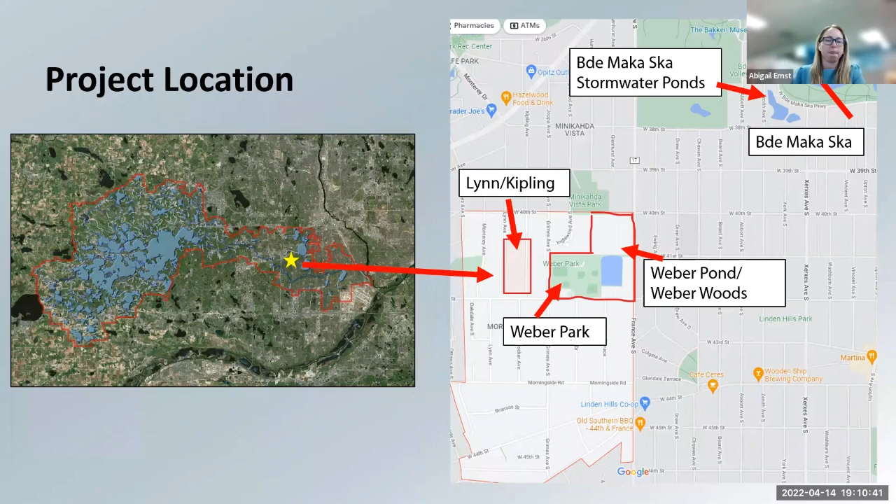Next, I wanted to share a drainage and storm sewer map. The project is happening here, and the drainage from the project flows through an existing storm sewer network before flowing through the stormwater ponds and then to Bde Maka Ska.

I'm going to talk through a little bit the project areas. The first and most upstream project area is the Lynn Kipling area. The main improvements to this area include pond excavation to remove material, which is going to provide more flood storage space. The runoff storage capacity is going to increase from 10 acre feet to 20 acre feet, providing flood risk reduction for those homes surrounding that area.

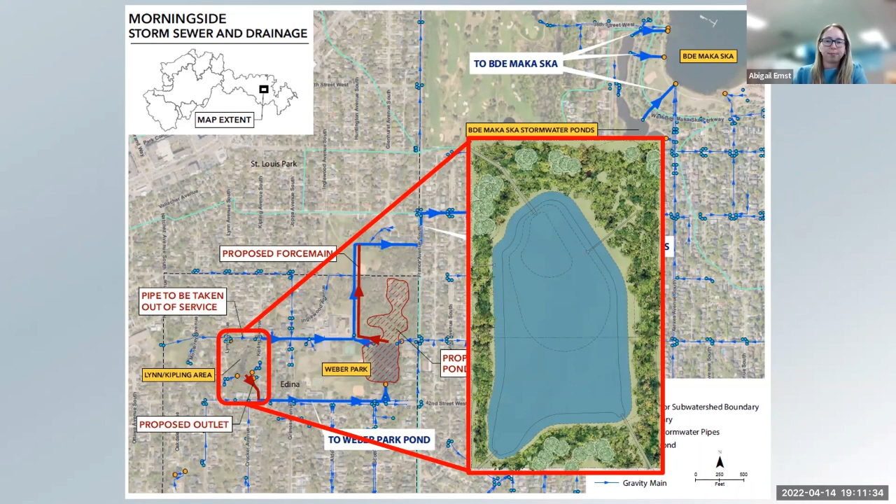The storm sewer system in this area is also going to be altered by splitting flows. Currently runoff from the Lynn Kipling area only flows through an existing storm sewer network north of that area, bypassing Weber Pond before heading to Bde Maka Ska. What the project does is propose a new outlet in the southeast corner, which will take some of those flows, specifically the low flows, and route them toward Weber Pond, providing additional water quality treatment before flowing downstream again through the existing storm sewer network. Additionally, the outlet at the northeast corner will be maintained, serving to route high flows around Weber Pond during storm events.

So the next area where there's work proposed is the Weber Park area, which lies between the Lynn Kipling area and Weber Pond. Improvements here include new pedestrian trails, reoriented ball fields, and a stormwater drainage swale.

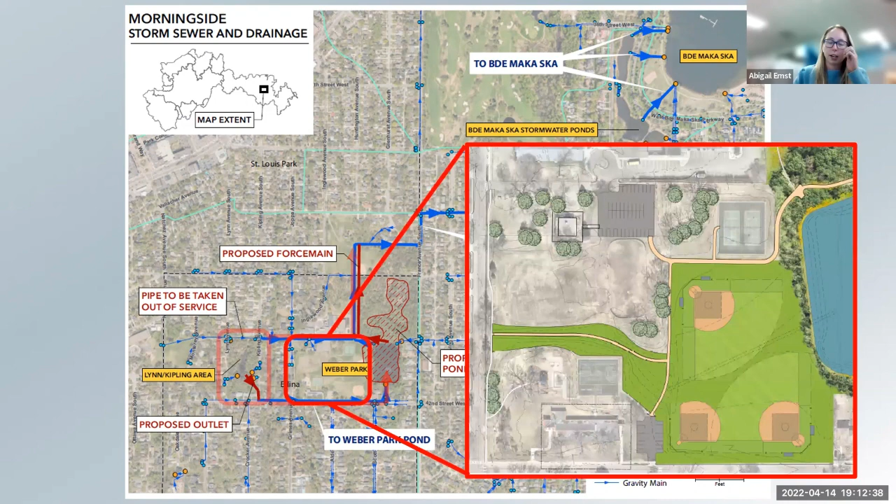Now moving past the park, I wanted to introduce the Weber Pond expansion. Weber Pond is currently a stormwater pond of about 3.1 acres, and as part of the project, it's proposed to be expanded to 6.1 acres. This happens by both excavation in the current ponding area and by expanding the pond into this northern wooded parcel and making that area deeper. That excavation and expansion is going to double the storage capacity of the area, going from around 50 acre feet to around 100 acre feet of storage.

That'll serve to collect stormwater runoff from the surrounding houses and also provide water quality benefit by allowing for more nutrients and particles from that runoff to settle into the pond before it flows downstream. In addition to the pond expansion, they've also proposed some perimeter trails and some boardwalks which will traverse the pond.

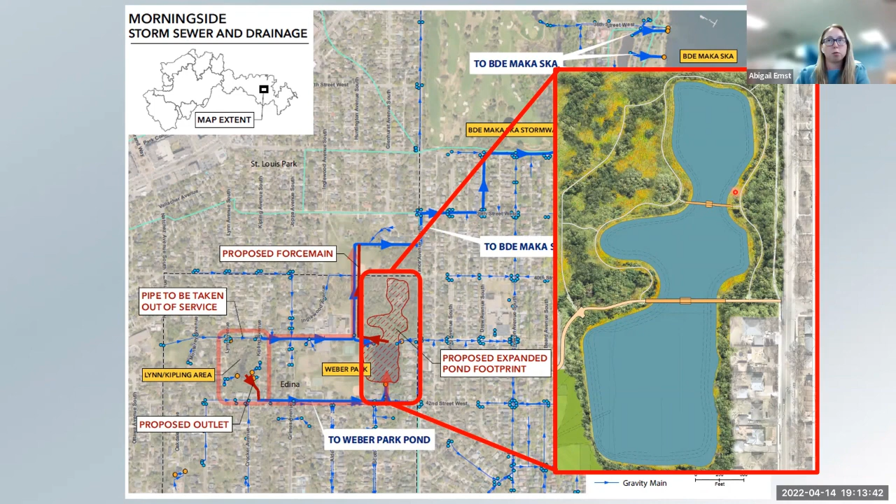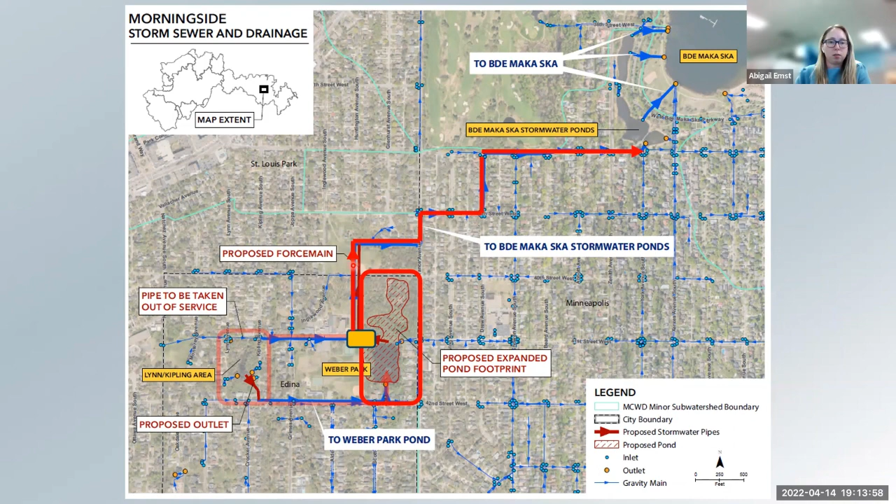In addition to the pond expansion, there's also going to be a pump station added right here, and that's going to pump drainage from the pond northeast along this red line and use the existing storm sewer system. That pumping is going to take place through 3 different regimes.

The first mode is periodic pumping. This will happen every day for about 1 to 3 hours, and it will serve to maintain normal water levels below the gravity outlet to compensate for the groundwater inflows.

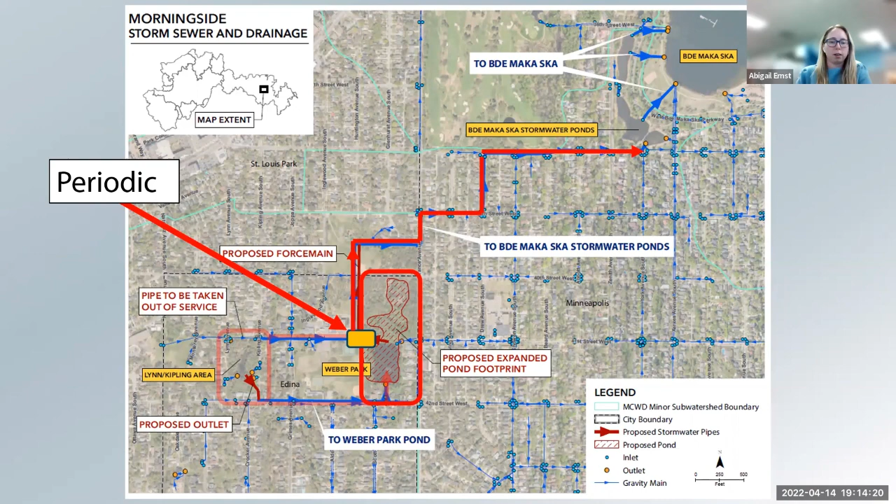The second mode is predictive pumping. This mode will be used in advance of 10-year storms and above, and it will lower the pond by up to 3 feet, dependent on weather forecast and the pond water levels. The whole goal of this predictive pumping is that they'll send water downstream ahead of storms, which will create more storage capacity in order to accept runoff from the surrounding neighborhood.

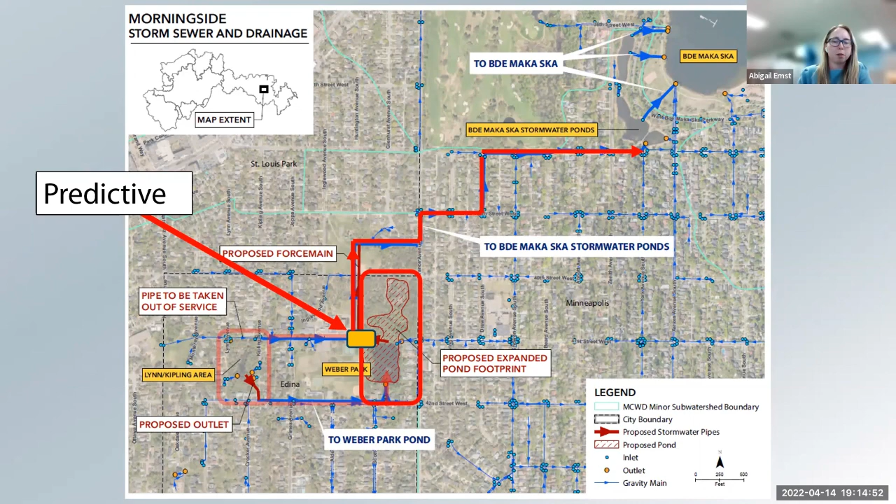The last mode is pumping during and after events. This will again take place during those larger events, so 10 year and above, and it will serve to manage the water levels. Again, that amount and duration is going to be dependent on National Weather Service forecasts and water levels at Weber Pond.

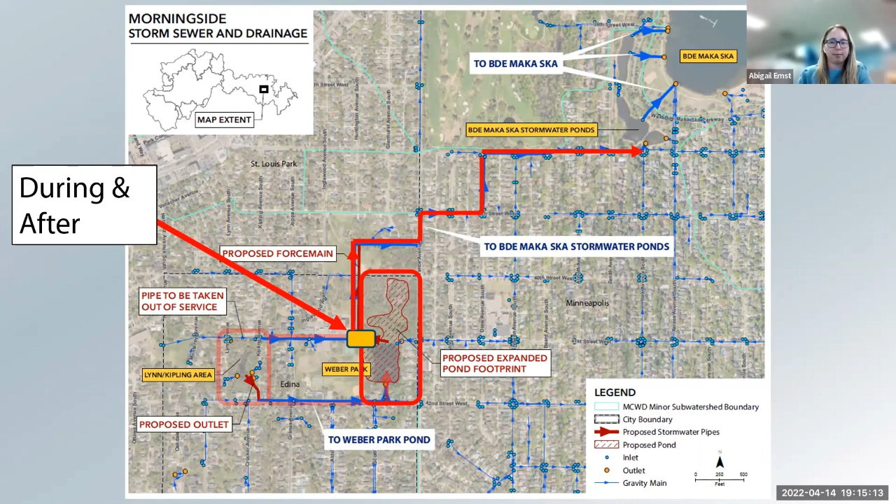So from here, I wanted to move into the rule analysis that was completed by district staff and engineers. Based on our review, the project complies with all the applicable MCWD standards.

The first rule that was triggered was erosion control, and this was due to the proposed disturbance of over 5,000 square feet. So once Edina puts the project out for bid, a requirement of the contractor is going to be to design an erosion and sediment control plan, which will be proposed as a condition of approval for the permit.

The second rule triggered is floodplain alteration, and that's triggered due to the excavation below the high water level of Weber Pond. As we discussed, the project is proposing a net increase in flood storage capacity, which complies with the rule.

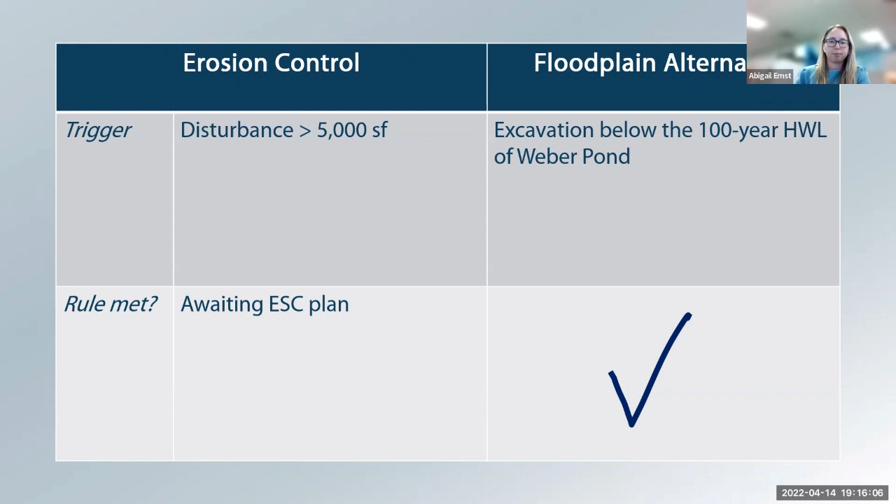The last rule triggered is the stormwater management rule, and this was due to the impervious that's being changed in the Weber Park area. So due to the site size and the proposed disturbance, the applicant is required to meet two parameters of the stormwater rule: the volume and downstream impact parameters.

The volume parameter requires that the project controls for the first 1 inch of runoff over the site's impervious, and they propose to meet that requirement by adding soil amendments in the ball fields and green spaces.

The downstream impacts parameter requires that there's no impacts to the downstream water levels. So the applicant modeled that during the 1, 10-year and 100-year storm events, Bde Maka Ska water levels will not rise, which is in compliance with the rule.

So rate control was not a required parameter to be met. However, the city still modeled peak flows at the city of Edina boundary and at the point of discharge to Bde Maka Ska. As shown for both of those locations, rates are decreased for the 10-year and 100-year storm events.

Additionally, although another not required parameter is phosphorus control, for the project we still evaluated this because of the interest in the project, and it provides phosphorus control by virtue of providing volume control. So through the soil amendments, they're providing a net reduction in total phosphorus.

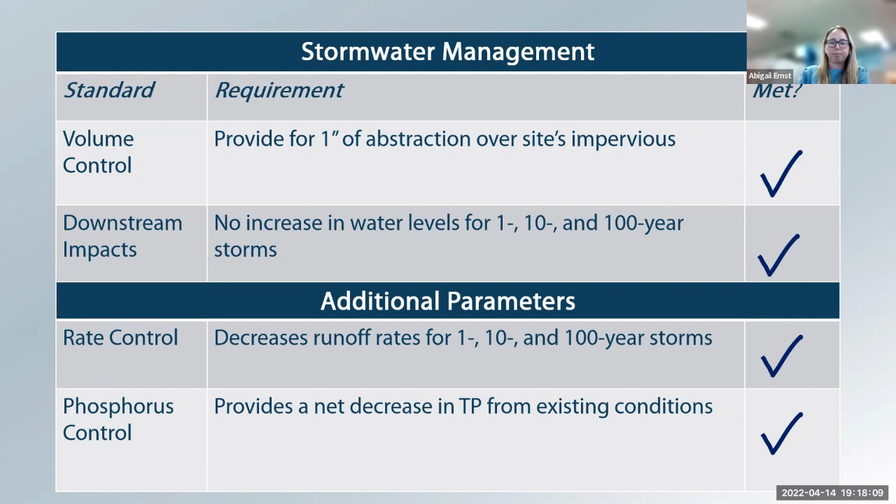While the project meets district rules and provides both water quality and flood mitigation benefits locally, and rates are decreasing downstream with no flood stage increase downstream, the pumping overall does send a larger amount of volume downstream than it does in current conditions. The volume has a secondary effect of increasing phosphorus to Bde Maka Ska by 8 pounds a year, despite that reduction of 34 pounds out of Weber Pond.

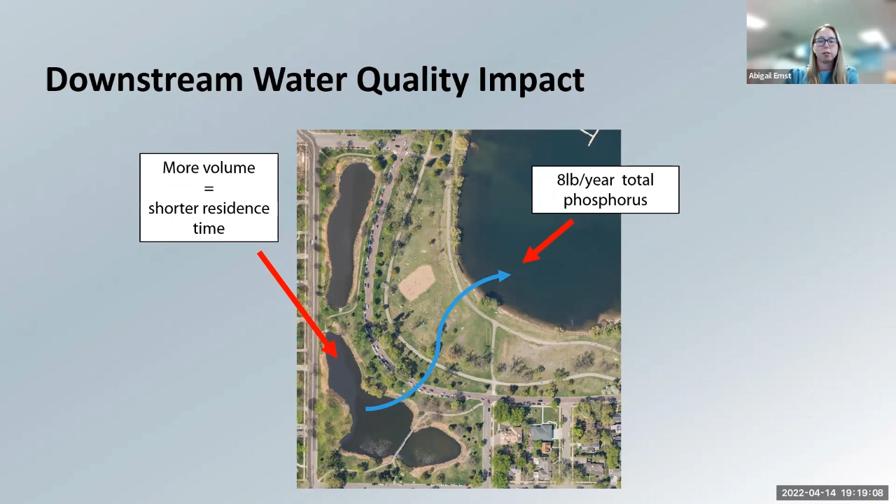The situation is unusual and not something the district has encountered before. Essentially, because more water is flushing through the pond, there's less time for particles and nutrients to settle out, which means they get carried downstream with that water. Although those 8 pounds only represent a 1% increase in the annual watershed load, it's still considered an overall degradation to the lake.

At the March 10th committee meeting, we discussed that in order to mitigate that impact, the district would apply a condition to the permit requiring the city of Edina to address those 8 pounds, either through a unilateral project at the Morningside project, or by working with partners to look downstream for projects that would create a net water quality improvement for Bde Maka Ska. This would happen through the signing of a cooperative agreement to address the impact.

Since then, the district has continued to meet with the city of Edina, the city of Minneapolis, and the Minneapolis Parks and Recreation Board to further discuss the cooperative agreement and its structure and the involvement in that agreement. That agreement can be found in the board packet. The cooperative agreement details how Edina is going to work with Barr Engineering to perform a feasibility study to address those 8 pounds or potentially go beyond that.

The feasibility study is going to explore options at the Morningside project for a potential retrofit solution. The study to look at that option is going to cost $55,000 and it's going to be solely covered by the city of Edina.

In parallel, the study is also going to be looking downstream for projects that provide a net benefit in water quality to Bde Maka Ska. This portion of the study is projected to cost $68,900. We'd originally proposed that the cost be split equally amongst the 4 parties, Edina, Minneapolis, the Parks Board, and the district, and that would be about $17,000 each.

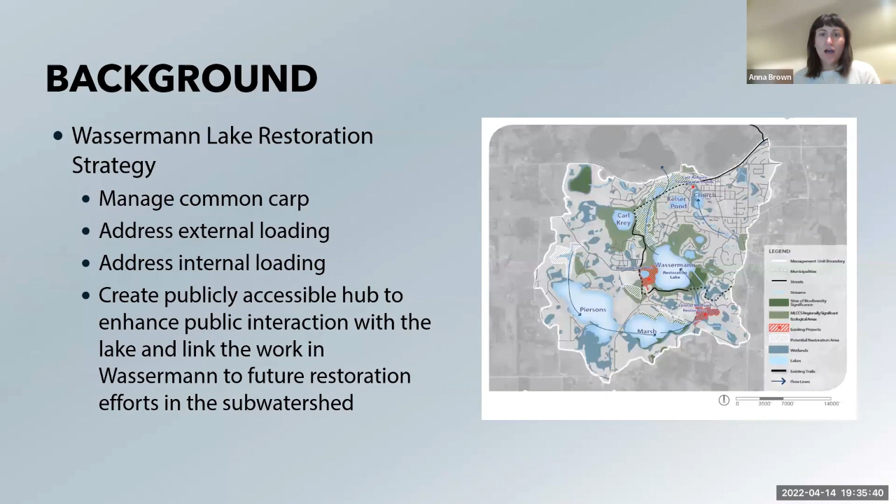We are in the process of doing so through the Wassermann Internal Load Management Project, our alum treatment of the lake. The goal of this project is to reduce internal loading by 90%, approximately 335 pounds per year. In doing so, we expect it will result in Wassermann Lake meeting state water quality standards. This project has a total budget of approximately $356,000, funded through a BWSR Clean Water Fund grant as well as MCWD match.

This is the second of two treatments on the lake, so we have $208,000 of that grant remaining after the first treatment.

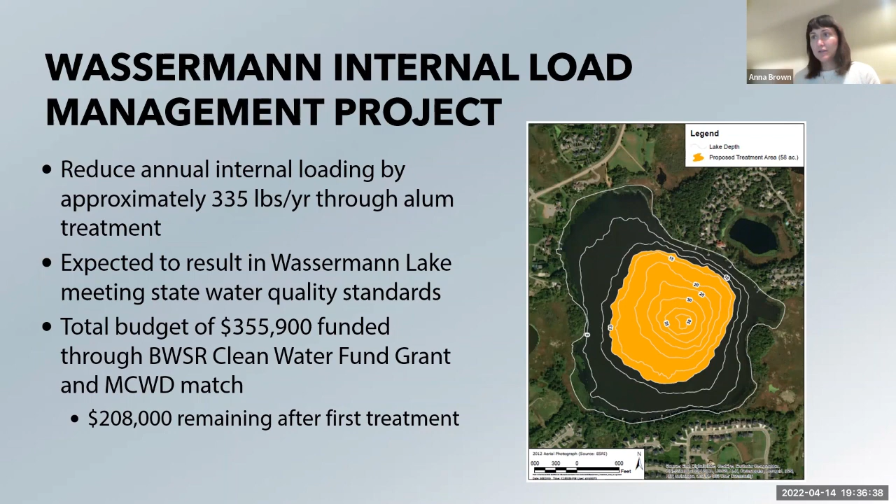The scope of work for Stantec contains a number of items. We are asking Stantec to manage the collection and analysis of sediment cores on Wassermann Lake. The purpose of this analysis is to be precise in our recommendations for treatment for the second round - to understand where the alum has been effective, and if there are areas that didn't address internal loading as well as we'd have liked, so we can be precise in dosing location and amounts as we work towards the second treatment.

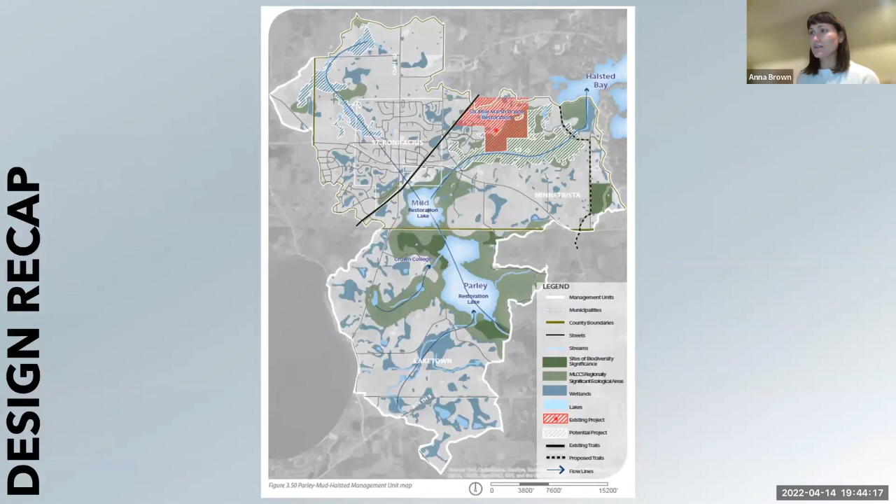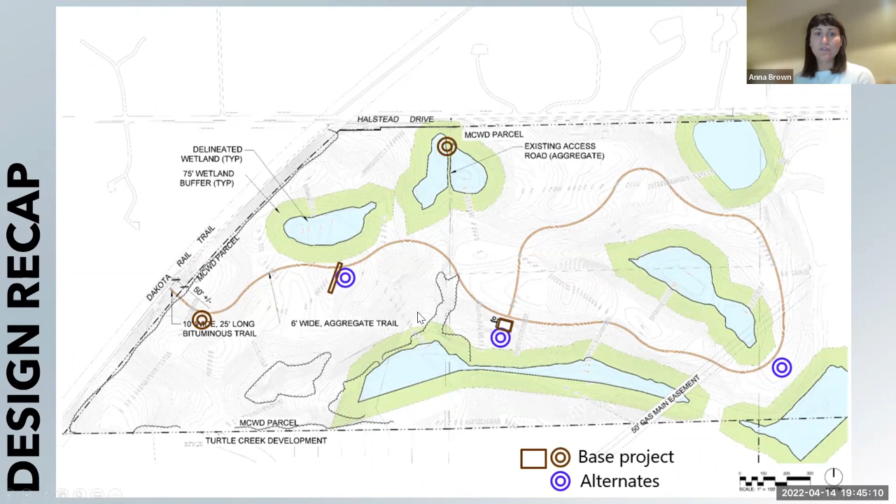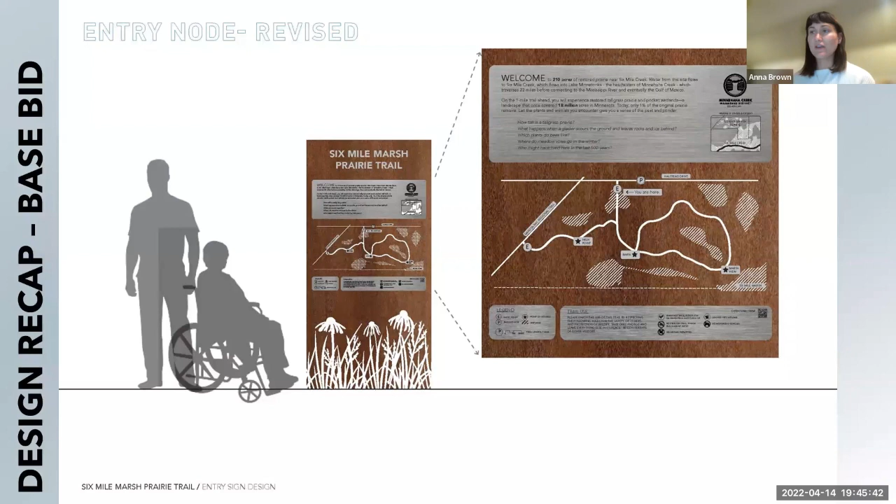So first, as noted, the base bid does include two entry signs. Each entrance off the regional trail, and then the driveway entrance off Halstead Drive, will have one of these signs. The signs include a location map, some basic facts about the restoration and the property, and rules for use. The first interpretive element included as a bid alternate is the transect feature.

The purpose of this interpretive element is to highlight the rolling landscape, highlight the varied topography, and create a visual representation of the connection between the landscape and 6 Mile Marsh. This features a base cut into the trail with a concrete slab covered in weathered steel plates that will have some language on them to highlight features of the landscape. It will also terminate in a steel plate that frames out the view shed and invites folks to look out across the landscape.

I'll note that while the transect is an alternate, the base bid does incorporate some base material, some gravel foundation that cuts across the trail. So regardless of whether the interpretive feature is advanced, the way that the base bid is structured right now will still highlight this location as a view shed.

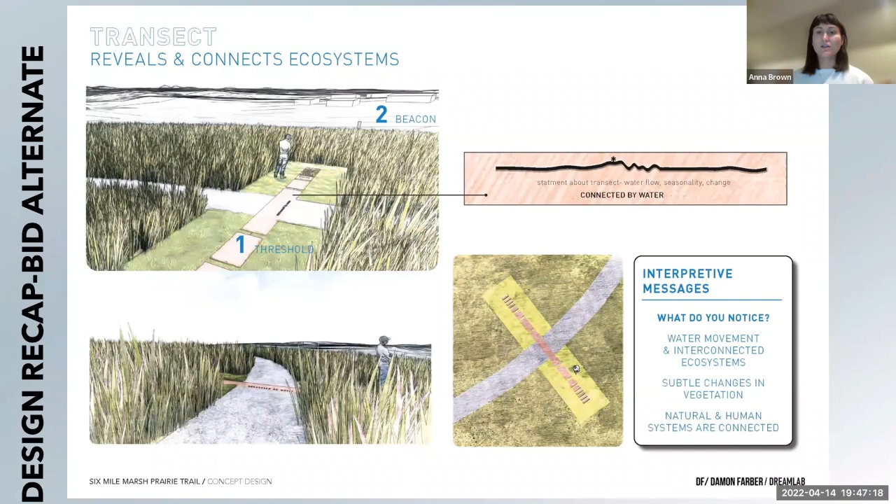The next interpretive element is the barn. The barn is a natural gathering place on the site—it's where the two entrances merge, and where the trail will split off into the loop. It's also the only structure on the site, so it's something people are naturally drawn to, and it has historic significance on the site.

The interpretive element proposes to add some signage cut into panels on the side of the barn. We're calling them viewing portals, where you look through and it will feature interpretive stories around the site's history, both from a natural resource perspective and from a user perspective, telling some of the stories of site use over time.

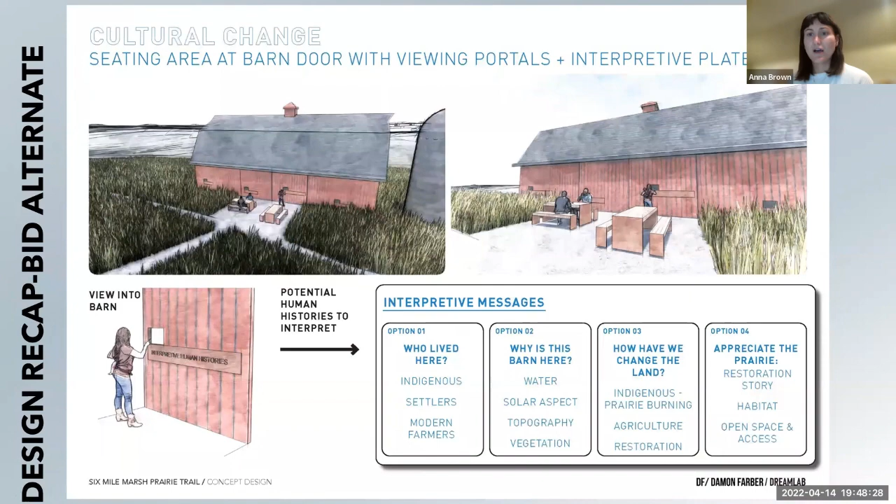The next bid alternate is what we call the watershed loungers—creative seating elements positioned at a great view shed point out over 6 Mile Marsh. The purpose is to encourage users to pause, take in the site, experience the varied landscape, and create a good moment for taking in the prairie, the restoration, and its connection to the marsh.

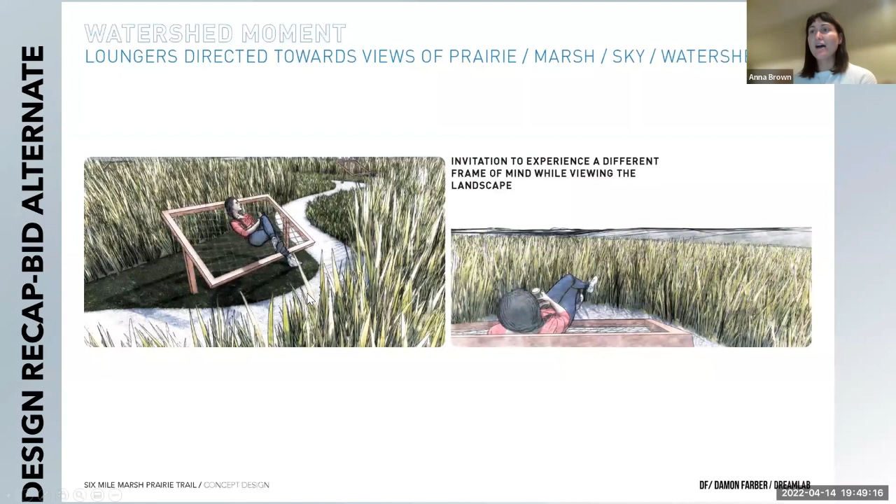These watershed loungers have standalone value, but the plan also proposes to further the storytelling at the site by including a watershed map that will provide additional context for the site in a sub-watershed context—how the site sits in the full watershed district—with opportunity to use text to tell the story of the land-water connection and features of the prairie in its watershed context.

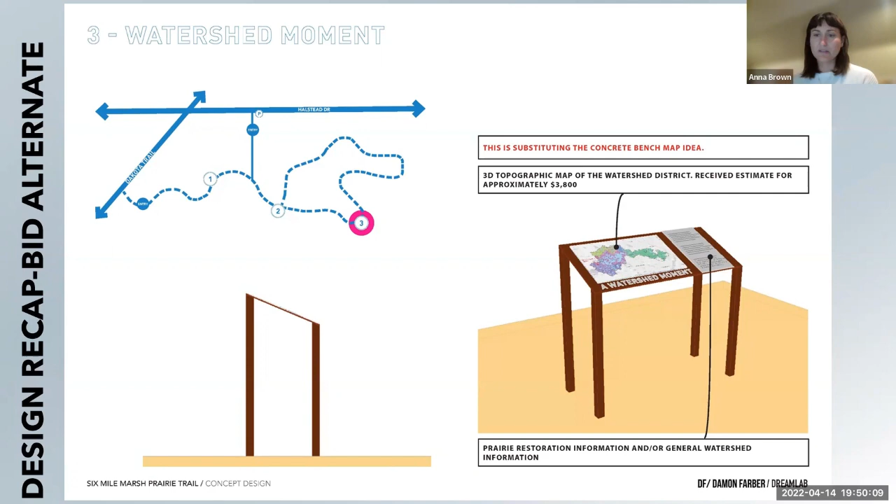So those are the 4 interpretive bid alternates. There is also a bid alternate relating to the trail surface that I will come back around to when we look at the 2022 bid results.

First, a reminder of where we landed in 2021. We first bid this project in September of 2021 with a flexible construction schedule, giving the option to construct in winter of 21-22 or in spring of 2022, which is the timeline we're now lining up with for this award. Going into that, we had an opinion of probable cost of $295,000, and we received 2 bids, but both substantially exceeded the opinion of probable cost and the project budget.

We had conversations with the bidders, the design team, and the board, and opted to reject the bids and look for efficiencies in the design before rebidding. Feedback from contractors around higher construction costs included uncertainty around design complexity, a lack of specificity around regulatory and technical requirements, particularly concern around the level of testing required. We also observed that the lump sum bid format, where we don't itemize specific costs, can cause bidders to pad their responses based on uncertainty. It was also bid at a moment when the bid climate was challenging, making it hard to get good responses.

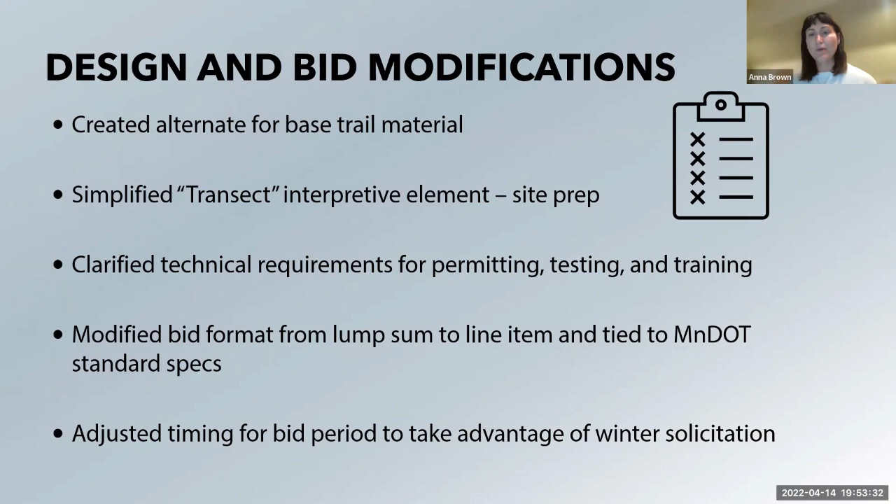And the gamble paid off. We were successful in bringing down the bid costs. The 2 contractors that had bid before, Sunram and Parkstone, did bring their costs down from the original bid, though not enough to be within shooting distance of the construction budget. But Urban Company's response aligned fairly well with the design estimate, just a little bit over, about 50,000 over the design estimate overall.

One item to note is that Urban Company's initial response had several omissions. They didn't include the list of subcontractors, didn't include their license number, and had provided a copy of the bid bond rather than the original. So we requested those items and that they correct their bid and resubmit. We worked with legal to make sure that in doing so, they weren't given any advantage or any opportunity to change their numbers or contract pricing.

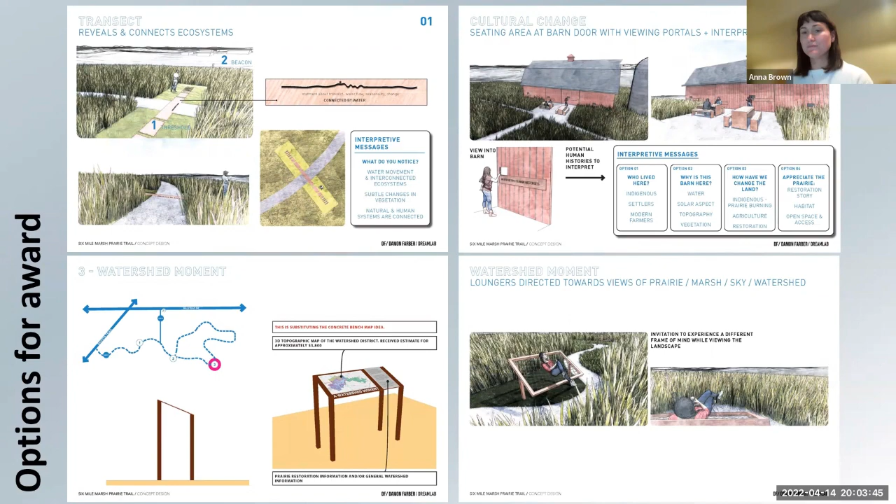So we'll start with question 1, maybe, and I can put up some pictures for reference if that's helpful, and then I can also leave us on the budget slide, whatever folks need to reference. You restate question 1, Anna, and then President White, Manager Loftus has her hand up.

So question 1 is, do you concur with the recommendation? I want to do this differently a little bit. I'd like to have a motion on the table before we proceed. So my suggestion is that we have a motion to take the base plus 3 with the minor amendment. That'd be my suggestion, and then we can talk about it. I'd like to make the discussion follow into, and you can lead that discussion primarily, Ms. Brown, but have it fall into chunks so we keep it tight. And then we can always move to amend at the end for whatever the board consensus seems to be. So could I have a motion to adopt the resolution as the base bid plus 3?

Move. Second. Sorry, Manager Olson moved, Manager Miller seconded? Correct. Okay, now Ms. Brown, I'll return it back to you.

I think Manager Loftus, you had a question or input. Manager Loftus: Yes, thank you, Anna. Great presentation as always, thank you.

I had a question. I'm trying to compare the loungers on the map, and I'm not sure what scaling the map back looks like, but in my opinion, having a map connecting that area to the full watershed is appealing. Looking at the loungers, I understand perhaps the appeal is a different perspective, but it seems to me that people would be sitting and kind of having a view up towards the sky. I'm not quite sure how that completely aligns with our watershed goals, but looking to you to maybe spell out the benefits a little more on those loungers beyond a place to sit and a perspective. I think the map is more appealing to me, kind of connecting that prairie to the rest of the district.

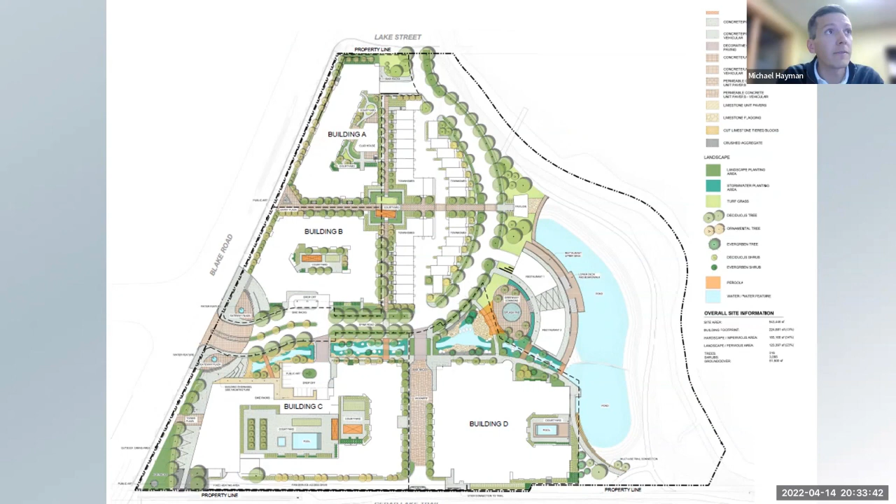The board will also recall that there were 4 key considerations agreed to by the partners as the joint board and council unanimously selected Alatus. These conditions, in partnership with the master development plan, create the foundation of the purchase and sale agreement in total.

To detail the considerations as they were carried into the agreement, it was first agreed that the purchase price would be $11.25 million over 2 phases, an $8 million and a $3.25 million phase, and the city council did not support the developer using purchase price as a subsidy to close any potential gaps. Secondly, the city would not further look to the district for additional financial risk, and the city would accept any risk associated with financial gaps, using tax increment financing, grants, or other subsidy mechanisms to help deliver the project vision set forth with Alatus.

The third element was the operation and maintenance responsibilities for the site overall, shared between the city, the developer, and the district, with the district's responsibility focused on its parcel and the water management features that we construct. And lastly, the joint liaison group would remain engaged throughout the process to assure mutually successful completion of the process and project delivery.

Using these key considerations and the master development plan, the district and our real estate counsel set out to develop the purchase and sale agreement in a way that would capture the intent of the deal while assuring both parties that their collective expectations for the site would be delivered—that the greenway amenities the development depends upon, the district's portion of the project, would be delivered, and that the regional stormwater offset improvements the district requires are delivered in order to position the development as it's planned.

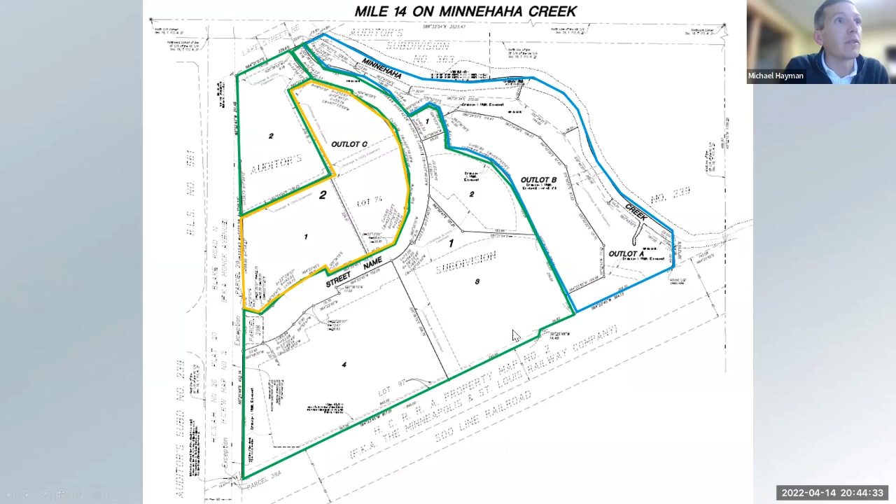Noting that the exhibits in the purchase and sale agreement are very detailed, in particular the exhibits related to the stormwater offset improvement area and the required components to ensure the district's regional project is not adversely impacted and is actually enhanced and improved. Exhibits B and C detail the stormwater system, the treatment process, and the landscape improvements, as well as other amenities that will be built as part of the overall improvement.

As you'll see in those exhibits, and I'm not putting all of them on the screen this evening, some of them are quite detailed and are large images and maps. It lays out the entire stormwater system being constructed up in the development area, and the stepwise process for treatment of the water being pumped from the regional stormwater system due to the buildings being constructed within the footprint of the regional system.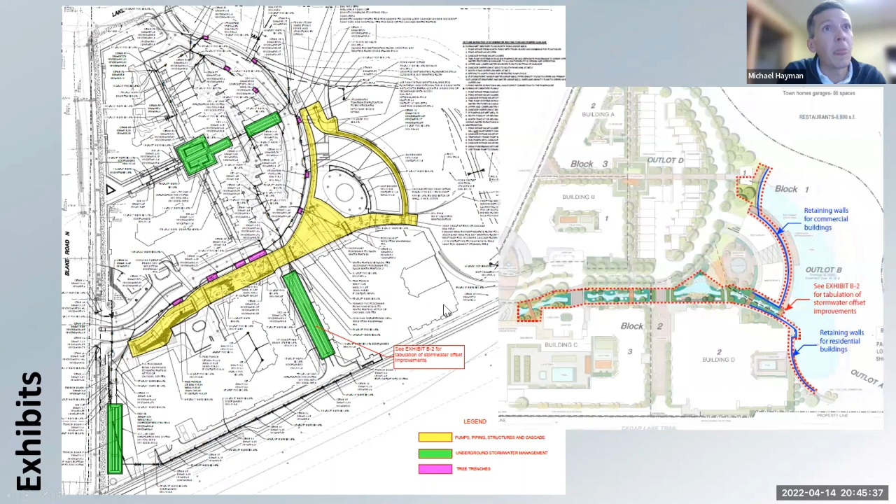It also details, from a landscape perspective, the retaining walls required and included as part of the offset area in order to stabilize the regional system and create the edge that the commercial and building D pose on that portion of the Greenway and regional stormwater facility.

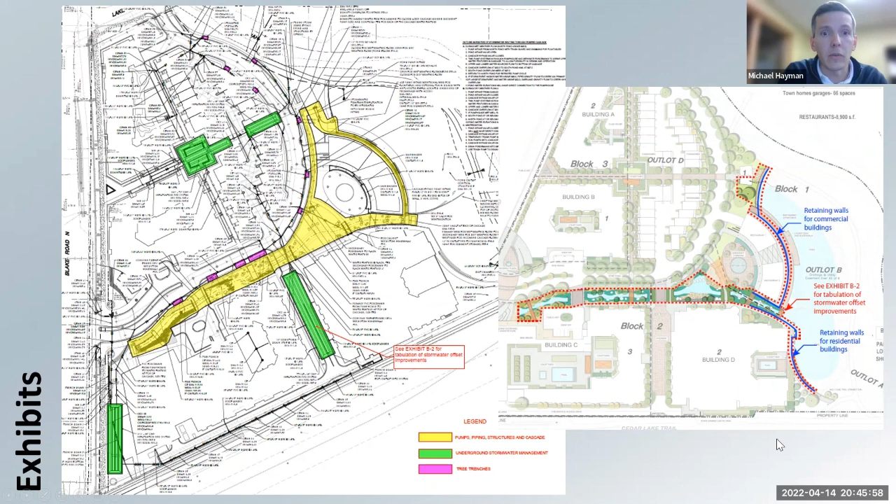So should the board approve the purchase and sale agreement this evening, the teams will immediately shift our focus to the various documents needed in order to close on phase one of the site. We know the developer has a desired close date yet this year, which will be dependent on satisfying the conditions we've walked through tonight.

We will immediately pivot efforts to develop those documents, such as the REOA and site development agreements, once the purchase and sale agreement is approved.

As you know, we are moving very quickly towards 90% design in an effort to begin construction activities on the site yet this year. We anticipate 90% design approval in June, and certification of the project through the Public Facilities Authority in June as well, if that's a successful grant application. We then anticipate phase one would close later in the summer or fall, and finally initiate the bid process for the district's work and commence phase one construction later fall or early winter.

And before I move to a final resolution, I believe Lewis Smith may have a comment for the board, or may have additional direction for us before taking action.

Thank you, Madam President, Board of Managers. I just want to note, obviously you've got a very thorough presentation here and you've had a great deal of time to consider this. It is a complex agreement. If there are issues you do wish to discuss with Mr. Selke and staff, it would still be appropriate for the board to go into closed session if it wishes, because it relates to the development of these terms for the sale of the property. But ultimately your vote to approve the agreement should be in open session. So I just want to reserve that option for the board, depending on any questions or discussion you may wish to have. Thank you. Are there managers who would like to discuss in more detail and go into closed session?